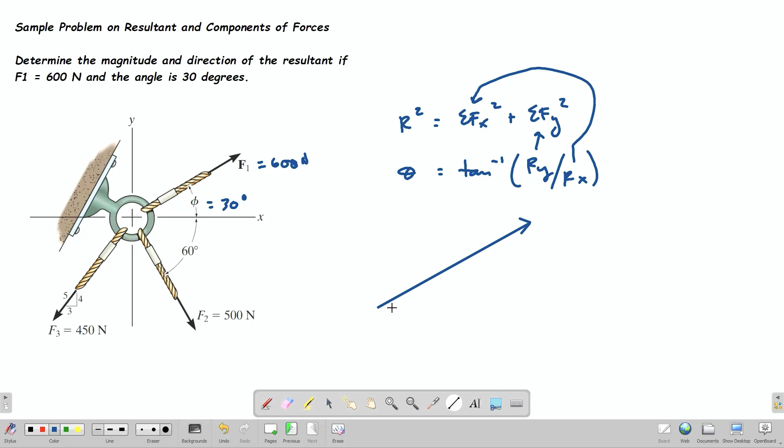Okay? So, start tayo dito sa F1, which is given naman yung magnitude tsaka yung direction niya. So, i-drawing lang natin yung F1 natin. So, yung F1 is pag ganito, no? And then, meron tayong components dyan na x-axis and then meron tayong component na y-axis. So, pareho sila positive, no? So, this one is 30 degrees. This one is 600 Newton. And then, we have F1y and then we have F1x.

Okay? So, kunin na natin si F1x. F1x is just cosine, no? Kasi nasa horizontal siya. Adjacent siya nung angle natin. So, that's 600 cosine of 30 degrees. And F1y naman, since nasa opposite siya ng angle natin, so that's 600 sine of 30 degrees.

Okay? So, dito tayo sa calculator natin. That's 600 cosine of 30. That's 519.61 Newton, no? 519.61 Newton. And then for F1y, that's 600 sine of 30 degrees. That's 300, no? So, 300 Newton. So, meron na tayong F1x and F1y.

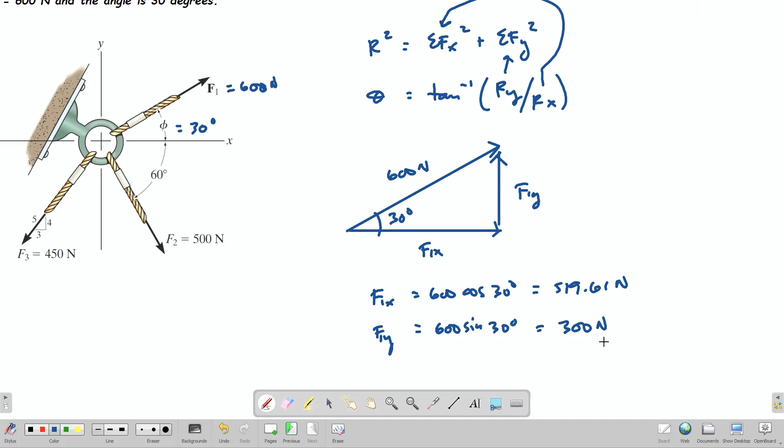Dito naman tayo sa F2. So, sa F2, dudrawing natin dito sa baba. Ganun, no? So, meron tayong positive na x component dito. And then, we have a negative na y component kasi pababa siya, no, downward. And then yung angle natin na given, this is the 60 degrees. So this is 500 and then we have F2y and then we have the F2x.

Okay? So kunin muna natin si F2x. So F2x, since adjacent siya ng 60, no? So cosine yung gagamitin natin dyan. So we have F2x, that's 500 cosine of 60 degrees. And then for F2y, opposite siya ng 60. So, that's 500 sine of 60 degrees. And then, dito tayo sa calculator natin para makuha natin yung values ng mga components na yan.

That's 500 cosine of 60. That's 250 Newton, which is positive, no? And then, we have yung kabila, 500 sine 60. That's 433 Newton. So, 433 Newton directed downward. So, negative yung F2y. And then, for the last force, dito sa figure natin,

so, didrawing lang natin yung F3. So, ganito yung F3, no? And then, meron tayong components na downward and to the left. So, parehong negative yung F3x and F3y. Okay? So, lagyan na natin ng label. So, this one is 450 Newton. This one is F3y. And then, this one is F3x.

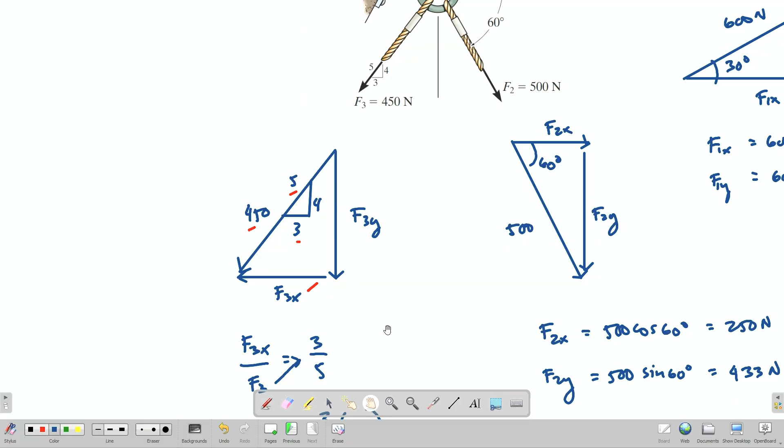Double check lang natin. Tama ba? 3, 4, 5. So, vertical si 4, horizontal si 3. So, tama naman. So, dito tayo sa calculator natin. Negative yung dalawa, downward tsaka to the left.

So, that's 3 times 450 divided by 5. 270 Newton. So, 270 Newton to the left. And then we have 4 times 450 divided by 5. 360 Newton. And then we have downward.

Okay? So, ngayon, para makuha natin si R, kailangan natin kunin yung summation of forces X and Y. So, we have summation of forces X. We have positive na 519.61. Tapos, positive na 250. And then, negative yung F3 natin na 270.

270. For summation of forces along Y naman, we have F1y is positive pa rin. That's 300 Newton. Tapos, F2y is negative, negative 433. Negative din yung F3y natin, that's 360. So, algebraic sum lang talaga yung summation of forces natin, X and Y.

Okay? So, dito tayo sa calculator natin. That's 519.61 plus 250 minus 270. That's 499.61. And then, unit niya, Newton. Sa kabila naman, 300 minus 433 minus 360, that's negative 493.

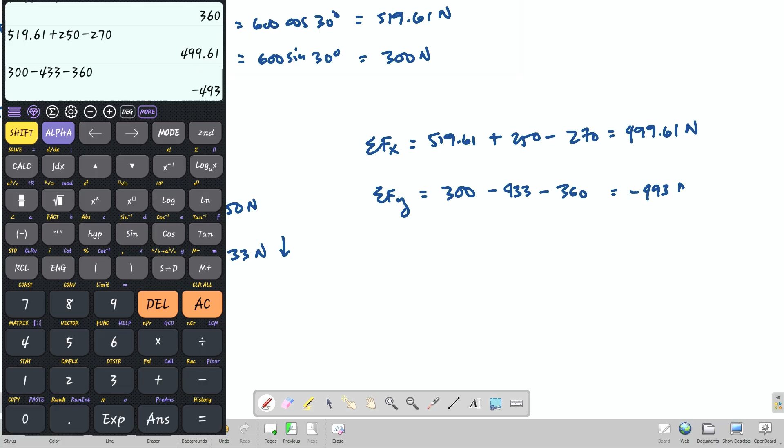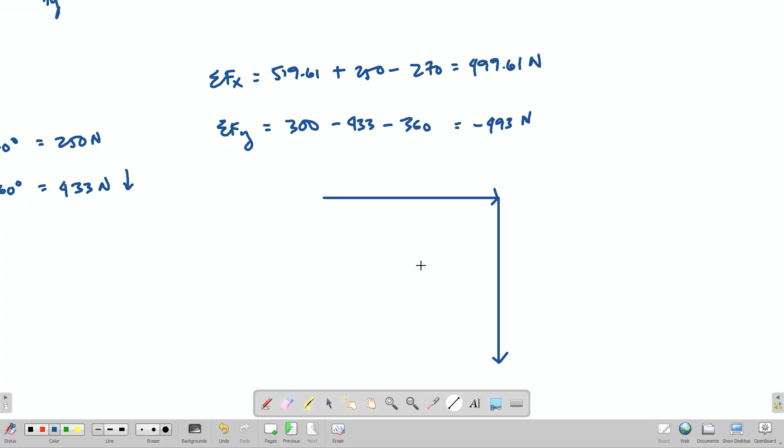Negative 493 Newton. So, drawing natin yung summation of forces X and Y. Ito na ngayon yung Rx saka Ry natin. Positive yung X. And then, negative yung Y. Tapos, meron tayong resultant, connecting the tail at saka head ng dalawang forces natin. Ito na ngayon yung resultant.

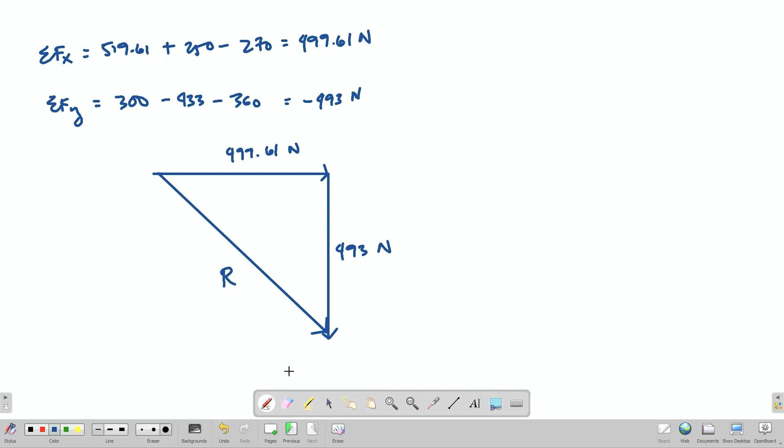So, we have R. This one is 499.61. And then, we have 493 Newton. So, para makuha natin yung resultant natin, square root lang ng dalawang ito. So, we have R is just the square root. Balik tayo dito sa equation natin. Square root mo lang ang dalawang figures na yan.

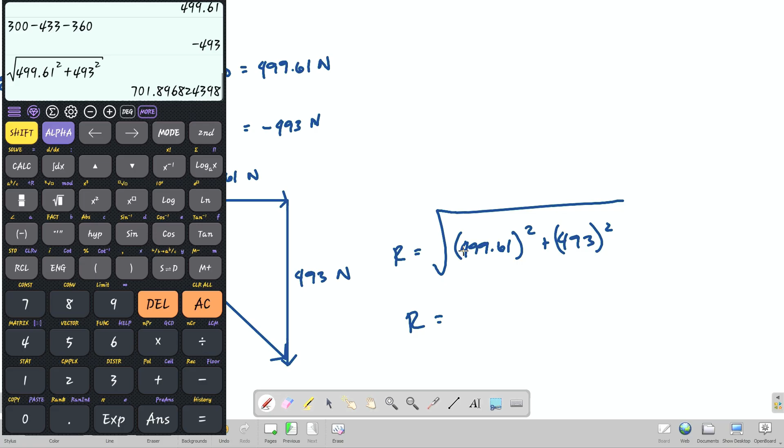So, we have 499.61 squared plus 493 squared. We get R equals the square root of 499.61 squared plus 493 squared. So, that's 701.90 Newton. And then, for the direction, based sa positive x-axis, this one is theta.

So, we have tangent theta equals opposite over adjacent. So, 493 divided by 491.61. Tama ba? 499 pala yan. Mali na tayo. So, that's 499.61. Tama naman yung na-evaluate natin kanina.

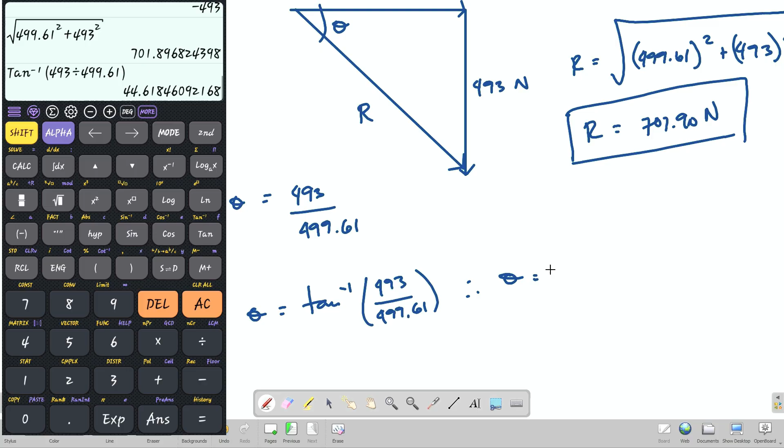So, we have theta is just equivalent to tangent inverse of 493 divided by 499.61. Therefore, theta is shift tangent of 493 divided by 499.61. That's 44.62 degrees. Makes sense naman.

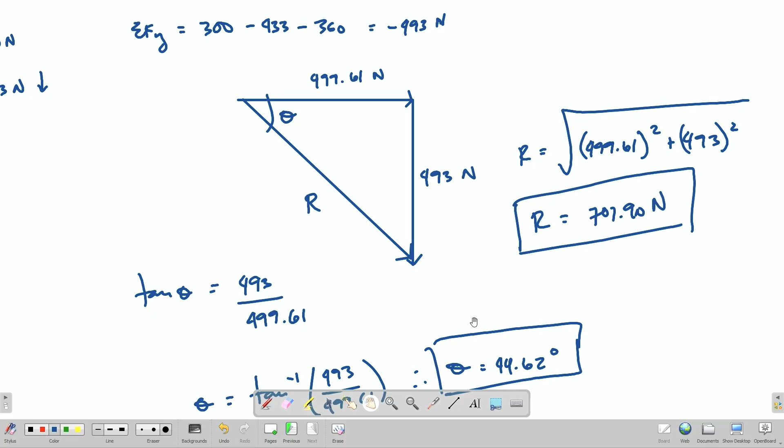Kasi 44 closer na siya sa 45. Almost equal lang kasi yung X saka Y component, 493 and 499. Konti lang yung difference nila. So, ito na yun para sa pag-compute ng resultant ng tatlong forces, tsaka yung direction ng resultant based sa isang axis. Dito, yung positive x-axis yung ginamit natin para makuha yung direction niya.

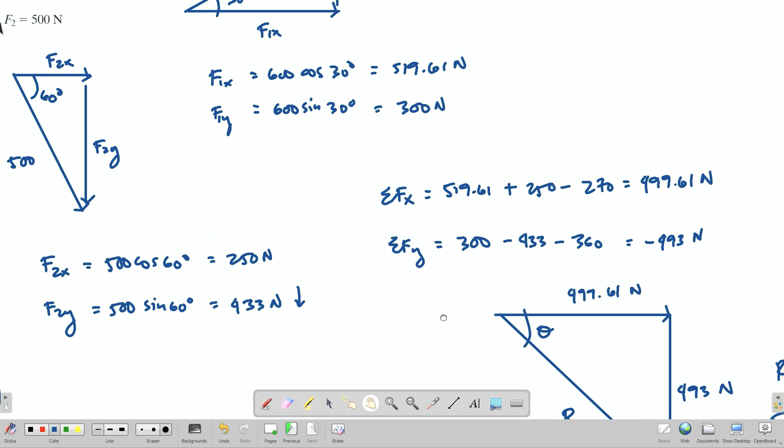So, again, kukunin nyo lang talaga yung components X and Y, tapos pagsasama-samahin. And then, you get the value of the resultant. Gagamitin natin yung Pythagorean theorem. So, I think yun na yun para sa sample problem na to.